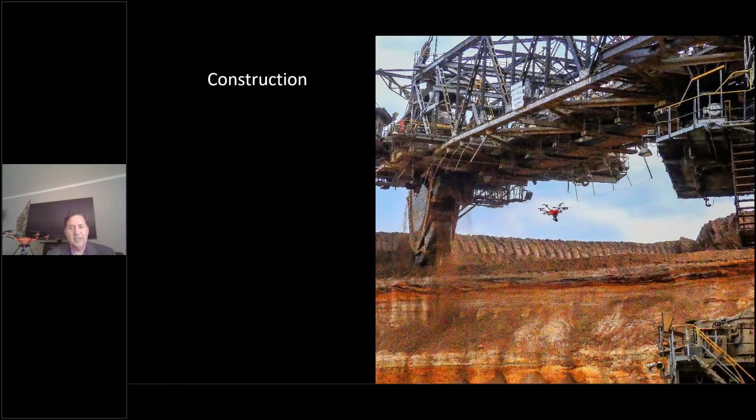So I think you can go through these slides, but here you see our UAV, the H520, serving agriculture purposes. It's widely used in construction. We have a number of talks during the conference on this. Inspection for towers, doesn't really matter where in the world you are. And then, like I said, on these payloads, we have a very high quality camera for a lot of precise mapping and surveying.

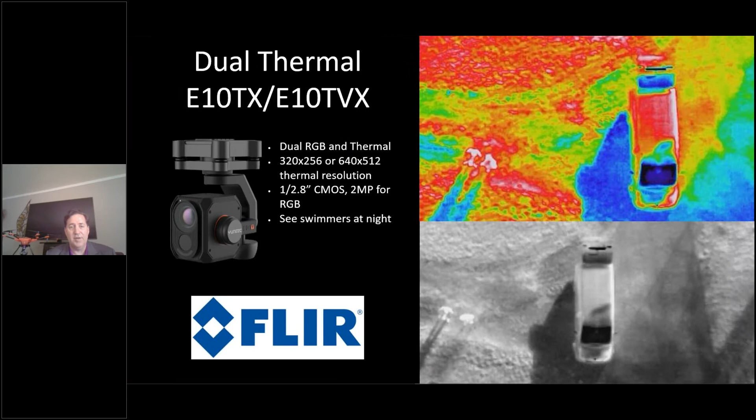Here, this is a cell tower inspection. Then we have thermal, using the FLIR sensors, up to 640 by 512. And then finally, optical zoom. Here you're seeing imagery at 1.2 miles away, when required. All of this then fits well into PhotoMesh. So without further ado, thank you very much for allowing us to participate, and over to Eatay to show the amazing values that the two products have together.

No problem. So I'll quickly review the PhotoMesh UAV package that we have bundled with Yuneec and are offering specifically for the UAV market, and then we can go over the actual demonstration of the products from PhotoMesh and the Skyline TerraExplorer. So the basic features and capabilities that we focus on: extremely high accuracy and quality, optimized for creating sharp corners, sharp edges, really best use of the texture.

We produce all of the basic 3D mesh formats, including Skyline's 3DML. You could also produce a point cloud, an LAS format, or True Ortho, and elevation layers. And we combine nadir, oblique, terrestrial images, all in a highly automated fashion. And you can also incorporate control points. You can work in any coordinate system, vertical datum, projection that is required by your customers.

The visualization side you could use for displaying different layers such as GIS on top of the 3D model, simulating movement, particle engines to simulate fog or smoke, as well as objects moving, and do any sort of measurement analytics in 3D. So that's really the full range of quality that we're working with.

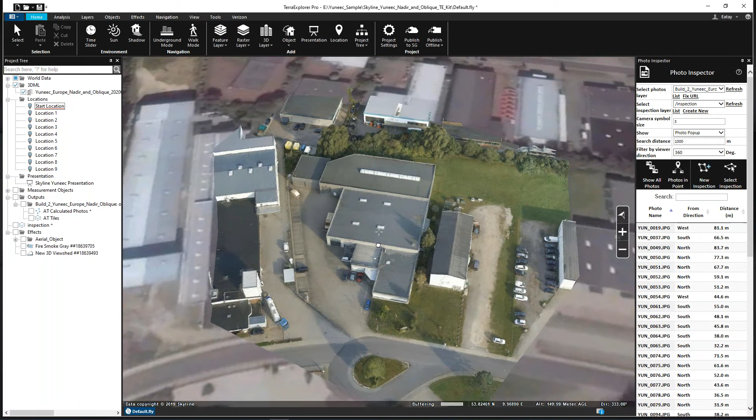You can see the general quality, and I'll jump back a little bit so we can go over how this was made, the process for creating this data, and then show the full tool set and capabilities available in the full suite.

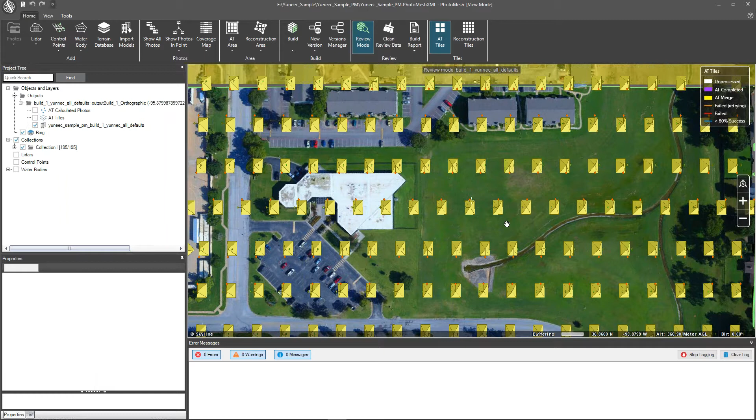To cover the PhotoMesh side, this project is nadir only. I have two projects to demonstrate: one is nadir only, the other is a combination of nadir and oblique, to see how the software deals with both. This is courtesy of Universal Aerial Ventures, a Yuneec customer and flyer out of Oklahoma.

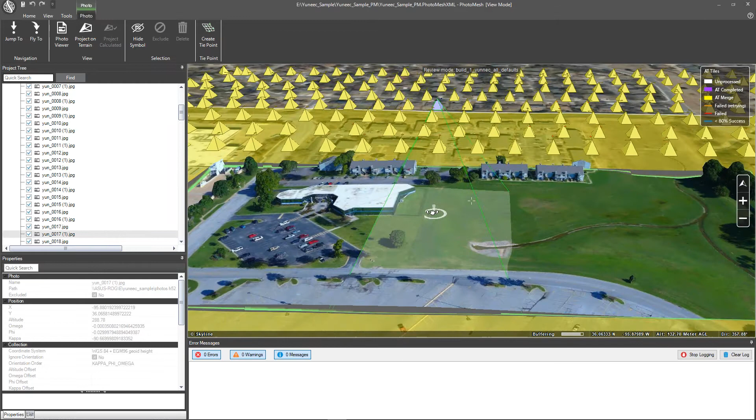You can see the display of the images and how they were collected. This is a single image. Even though the images are nadir only, you can see on the side of the image, given the field of view and lens opening, the sides clearly, and you have very good parallax for doing depth measurement and creating the model.

Out of good overlap nadir data, we take the entire data set and produce an aerial triangulation. As part of it, we calibrate the sensor and lens—the principal point, radial distortions, focal length—whatever is necessary to achieve good quality correlation between all the images.

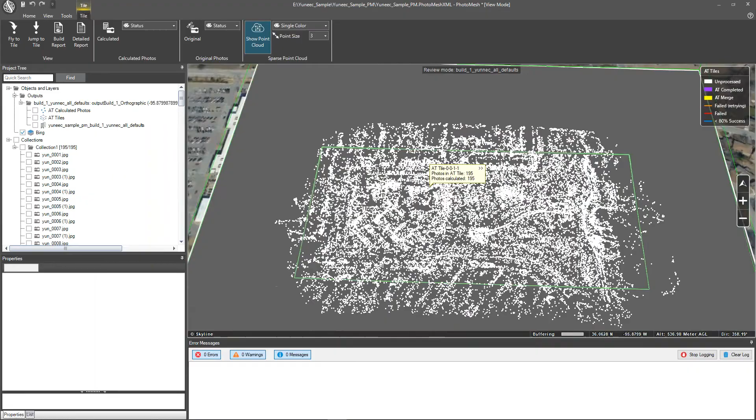This is a sample of all the tie points that were extracted in this data set. So a very robust aerial triangulation engine.

At that point, we go through a full process of dense pixel extraction. This is a sample point cloud that was extracted from any combination of two or more images that were able to correlate data.

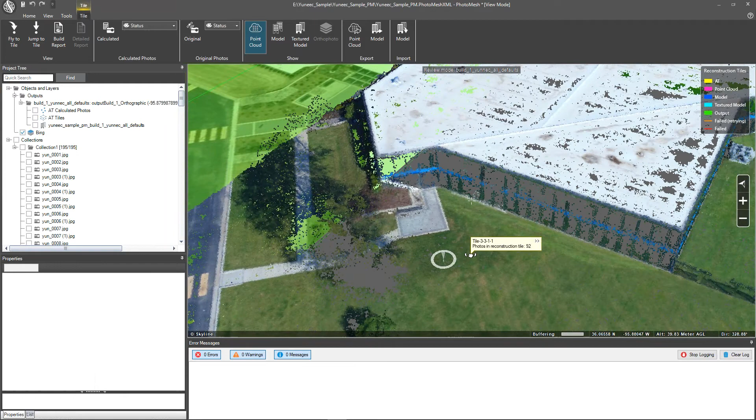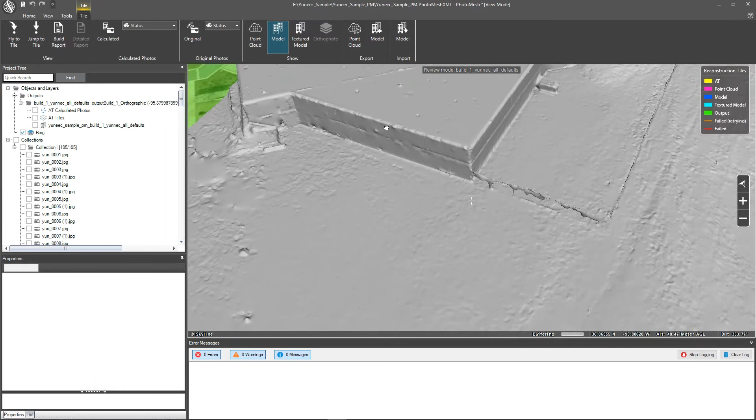Then we go through the process of creating a surface. You can see one of the clear advantages Skyline has is edge extraction—we extract linear features, essentially break lines. There's a very sharp edge to the building, and corners are also correlated with high fidelity, which helps create a more realistic view and less of a melting effect.

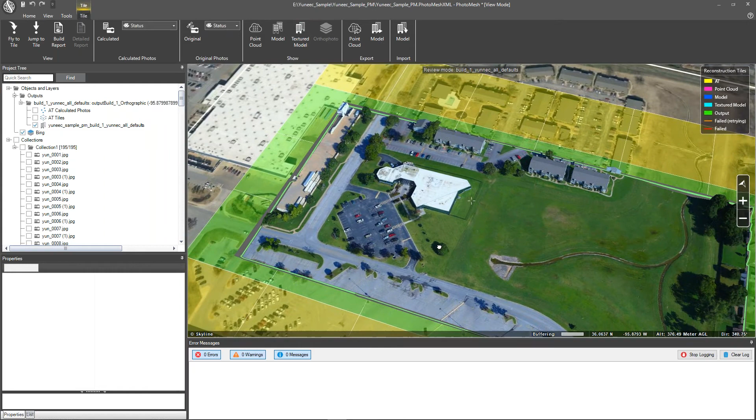This is one tile. The project can be divided into tiles, with the option of using multiple computers for parallel processing and scaling large projects with PhotoMesh UAV Pro. At the end of the process, everything combines into a single 3D model with built-in pyramids and levels of detail, so it's easy to move around and stream over the internet.

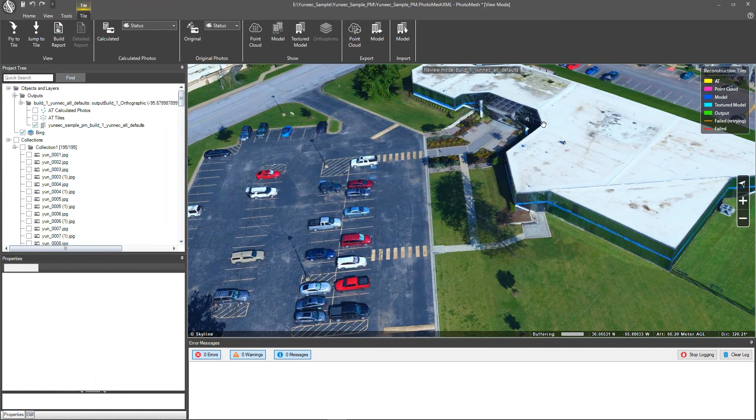This is just an example of what you could do with a nadir-only data set with good overlap and resolution, which is already a pretty good product. The other data set we'll review quickly before jumping into the TerraExplorer visualization side is a nadir and oblique project.

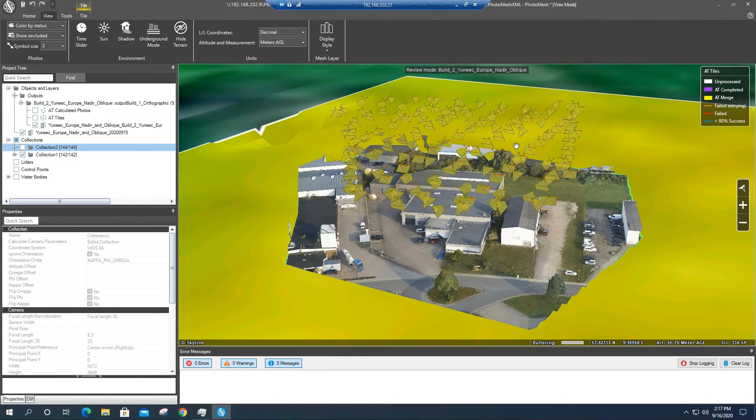You can see these are the nadir images that were collected, and these are the oblique images flown in both north-south and east-west directions, each time pointing at a different angle—this strip pointing south, this other pointing north, and the same with east and west.

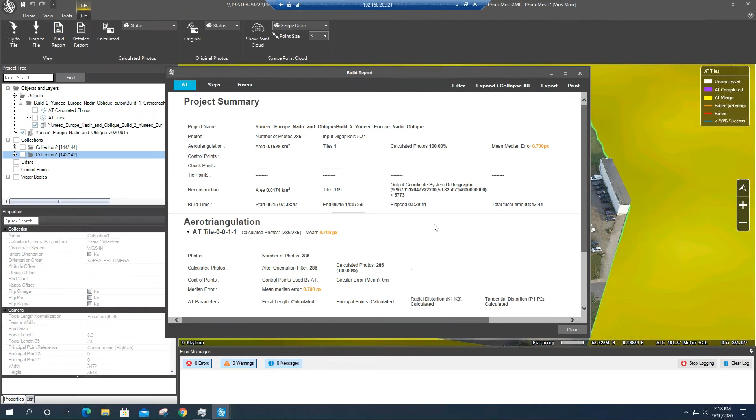We're also able to automatically calculate all of these images, and we calculate 100% of them with good residual. We can calibrate as many cameras as necessary and treat them as different cameras to achieve the best quality in the geometric output, the bundle adjustment.

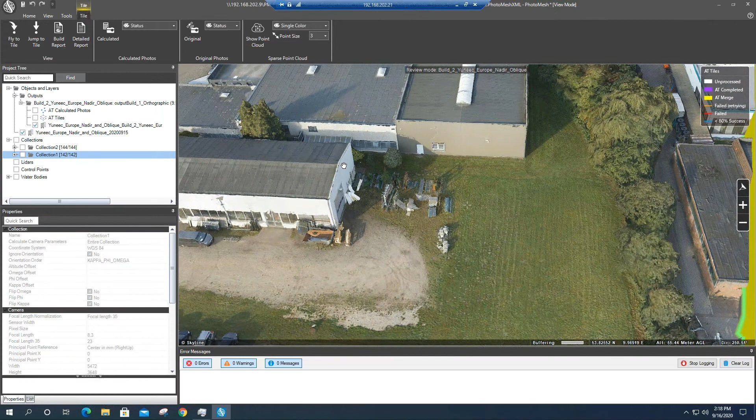You can see the difference once you have the obliques is you clearly get better mapping of facades and sides of objects such as walls. The edge extraction still takes place to produce a very clean edge line, and it also allows you to get underneath features using the oblique imagery.

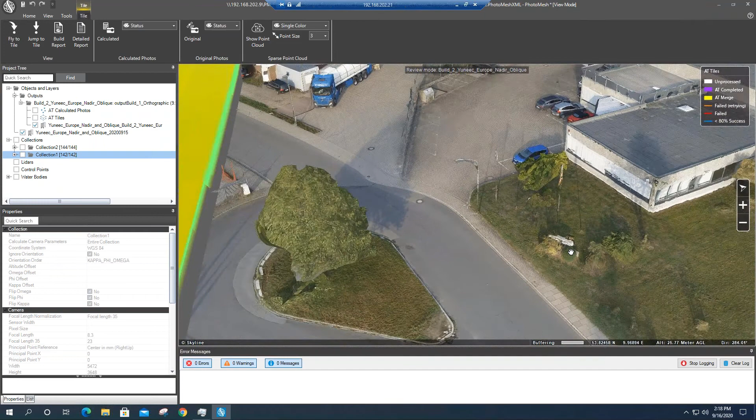So things like getting data underneath trees, as well as capturing poles from the side to have better representation of thin features. These are examples of PhotoMesh with different unique projects being processed through.

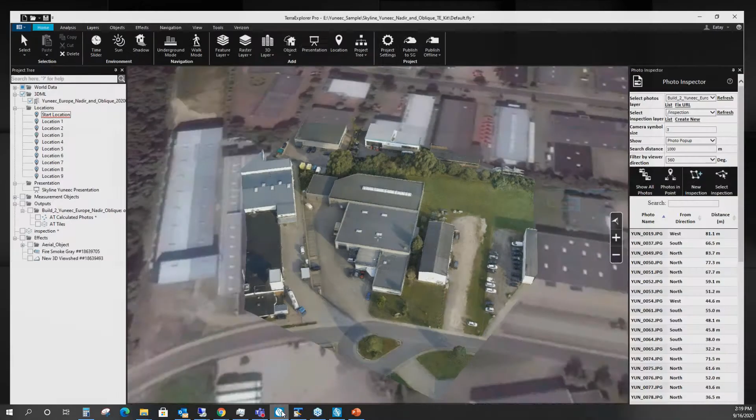Now on the TerraExplorer side, once the data is brought in, everything that we do is in a real world location. So you can see, zoom out, this is in North Germany, near the border with Denmark.

We can incorporate additional ortho layers or stream in WMS layers, so you could take advantage of Mapbox or Bing or any other background layer, as well as Skyline's own base globe imagery and terrain. Everything is displayed on a global scale, and it's also in 2.5D, so you get representation of terrain and any sort of elevation relief.

To give you some insight into the capabilities for measurements and analytics, any sort of 3D measurement is possible, whether it's on a slope or a 3D plane, a 3D area, general vertical measurements, horizontal measurements. This is a measurement of the garage door, as well as 3D analytics.

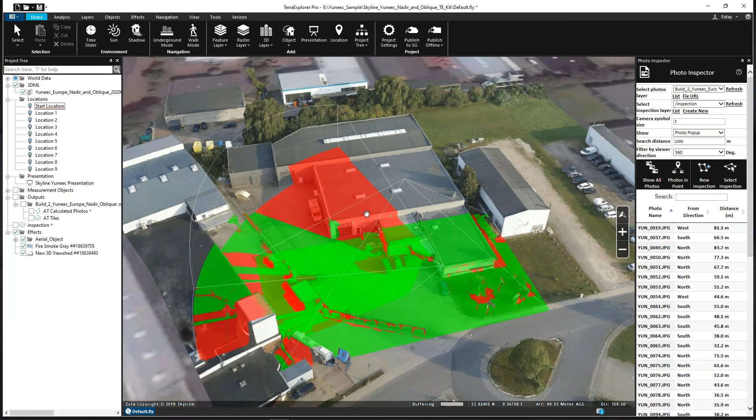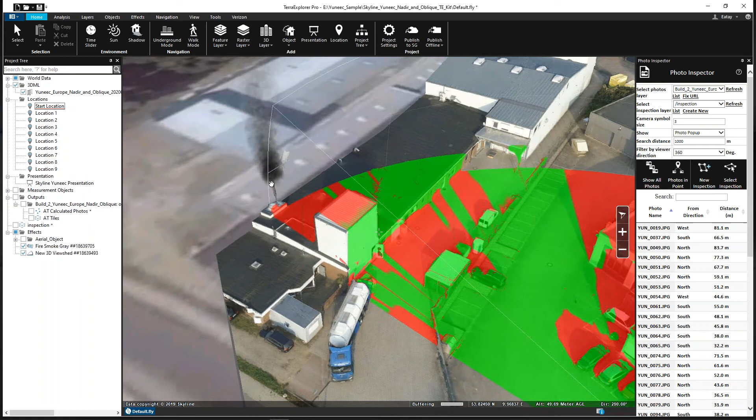You can see over here, I'm simulating a flight, and this is what the camera would be able to view from the flight. So a moving 3D viewshed, as well as a static viewshed, which could then be used to analyze a camera view and obstructions from different angles in order to understand how to position certain things. And then I could also simulate smoke, wind, water, any sort of effect using our very advanced particle engine. These are some of the capabilities that are available.

The other ones which are built into the tool on the fly - you could do a terrain profile. So if I wanted to view a side view of this line, I can calculate the profile and have a view of everything that is within that line.

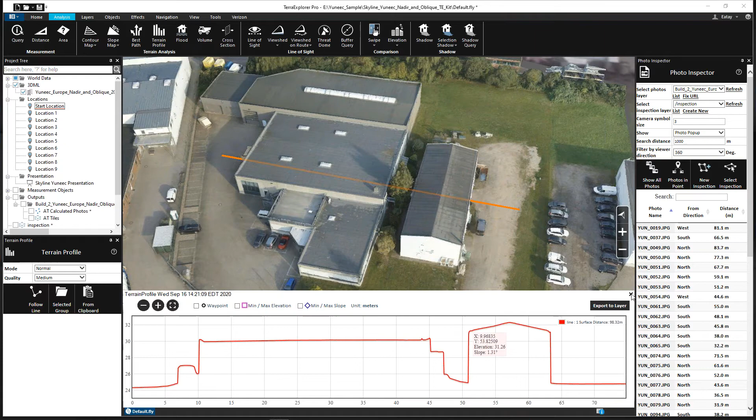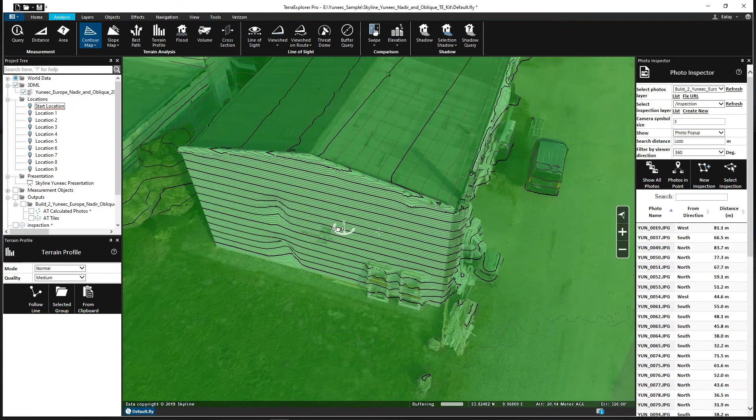And also I can measure slope on it, measure distances, as well as display a dynamic slope map on the fly, so I can see the directionality of the slope as well as the angle of it. And also a contour map, which is also dynamic - as I zoom in, it brings in more contour lines, so you can really get a sense of the depth. And of course, you can just measure it.

Besides the visual aspect of it - let's say if I wanted to measure the distance from here to here, you can see I have a 3D measurement of both the vertical difference and the horizontal distance and the aerial distance, as well as the slope. So this is all possible within the tool.

The last specific feature that I'm going to review is the photo inspector. The photo inspector allows you to view the raw images, the original images that were used to produce the data, and this could be utilized in order to do inspection or get access to the native resolution of the pixels. So let's say if I wanted to view this sign in one of the images, I can click on it.

And then it gives me the option for which image to view it. I can decide to view it from a certain distance or what I think is the closest image, and there's the image - that's the location I clicked with the image on it. You can also see the smoke coming out of these chimneys that actually wound up being modeled a little bit. So this gives you an idea of what the original image looks like.

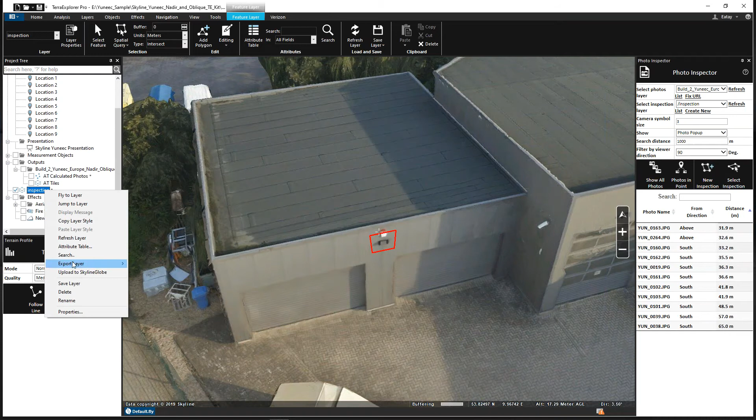And that becomes a layer that you can then export into really any common format - SQLite, shapefile, geodatabase, or 3D geospatial PDF. So those are some of the ways that you could utilize and accumulate inspection layers inside the tool.

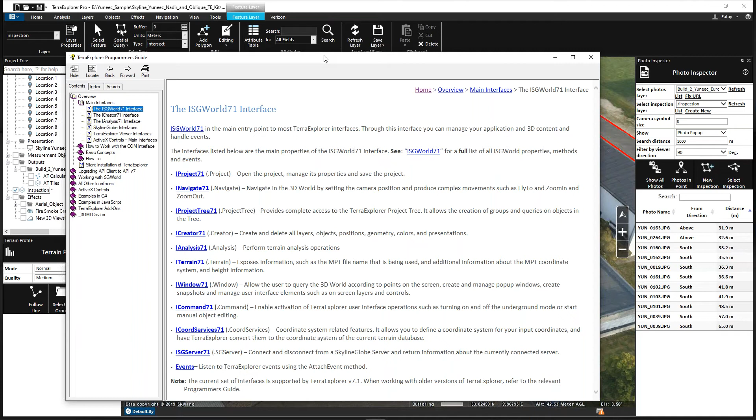Skyline TerraExplorer allows you to utilize the 3D engine and all of the tools available in order to create your own workflow and applications. We have certain customers that utilize it to do flight analysis or automated flight analysis.

We're more of a technology firm. We focus on developing the 3D technology, optimizing 3D streaming, and all the 3D tools available on top of the layers. We work a lot with other businesses, like Yuneec in this case, drone manufacturers, but also industry-specific ones, like in mining and construction, who then utilize our API.

On the question about the photo inspector, it's an add-in that we can produce TEZs for that get installed inside the software. So that's possible as an add-on in TerraExplorer. We look to the future to maybe have it built into the tool to some capacity, and it'll also be available through the API for people to customize and add additional features to.

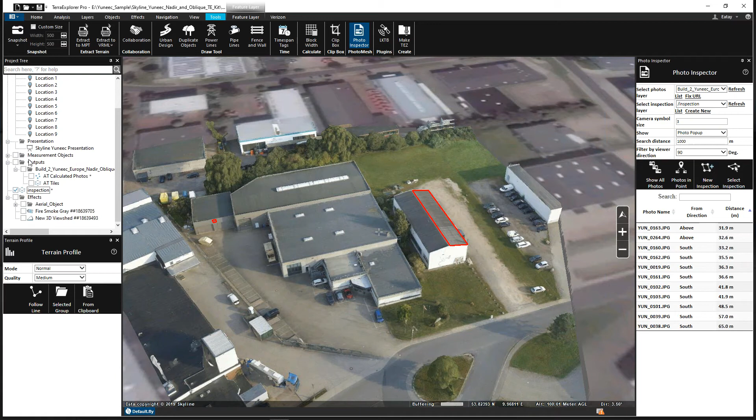So if there's no further questions, I think we're getting close to the end of the half-hour slot. One more thing I'd like to highlight is we can create an automated presentation.

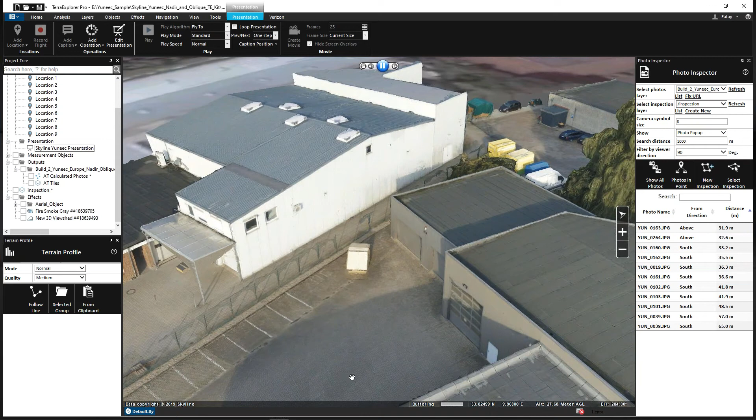Once you bring the project in, sort of like a macro, you could record certain steps, fly to different locations. Then when you distribute the project to somebody else, all they have to do is double click the presentation, and you see it goes to different locations. You can add captions, turn layers on and off automatically, and measurement objects.

So you essentially create a scene or a fly-through that at any point could be paused. You could view it, turn it around, show something, and then go back to the presentation and continue playing it.

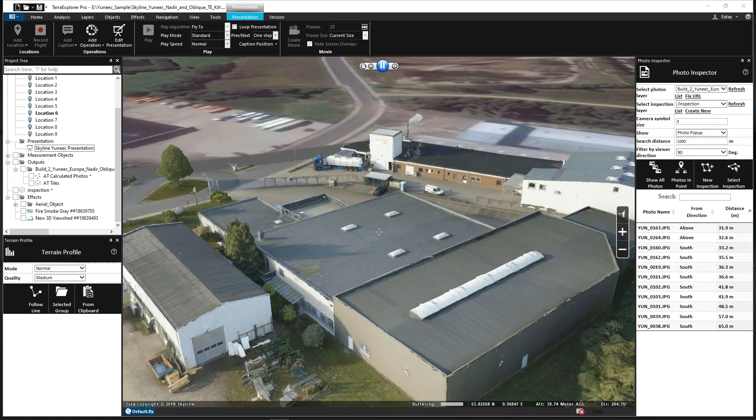Excellent, thank you so much, guys, that was fascinating. If there are no other questions... oh, I see one more question. Itai, they're asking about running the software in real time, and the minimum computer hardware needed to run it.

The minimum is probably 16 gigabytes of RAM, an i7 or an i9. We do not require a very high-powered GPU; we can work with the onboard video card.

In terms of running the software in real time, I don't think using the drone computer would be enough, but as soon as the images come down, we have the ability to scale up and run on several machines at once. In our internal production, we have almost 100 computers running.

So you can set up in the field a 5-computer setup, and they don't have to be powerful computers. They could be mini PCs about the size of a VHS tape, and you can set up a 5-computer configuration that processes through the data very quickly.

Let's say a project of about this size, around 200 images, would process on a single computer within 7 or 8 hours. But if you run it on 5 computers, it could finish in an hour or an hour and a half. So you can have the results pretty soon after you land.